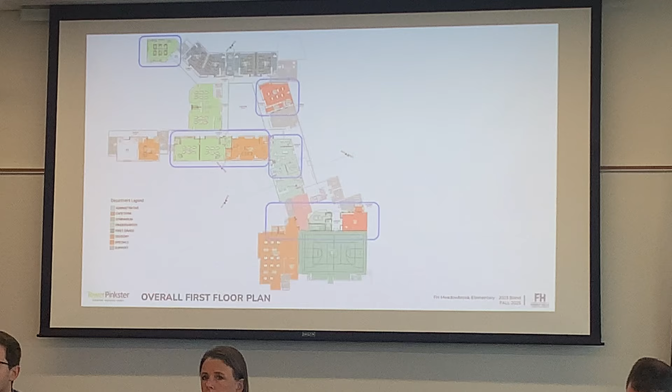We're doing some mechanical updates and, of course, our big move to make learning visible. So again, all classrooms will be touched with ceilings, lighting, finishes, including all of the main corridors. Pretty much something gets touched everywhere in this particular building.

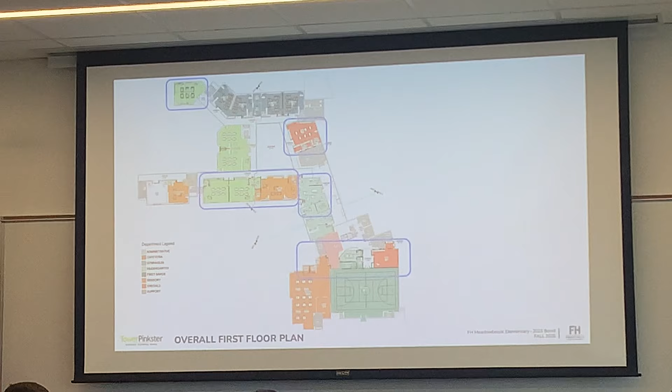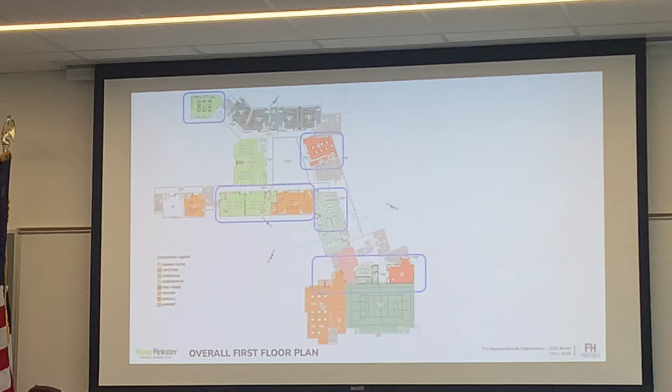The blue areas on the plan - this is a little bit unique because we're two-story and kind of buried into a hillside. So we've taken the opportunity to move some programs around a little bit in this building, because we're able to get art where there's a little more daylight. We're able to expand off of what is an oversized gymnasium right now to move some music programs and also get some conferencing space. So it is a little bit different than some of the other buildings.

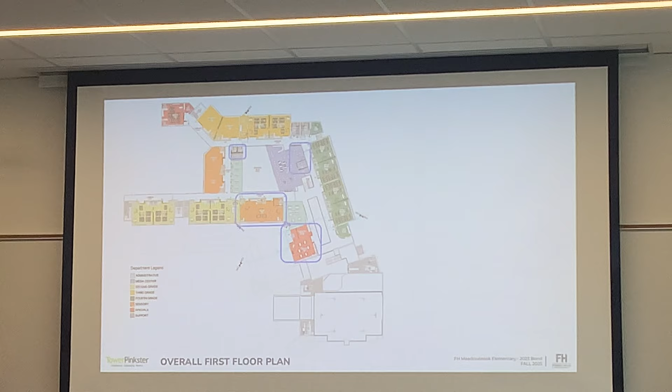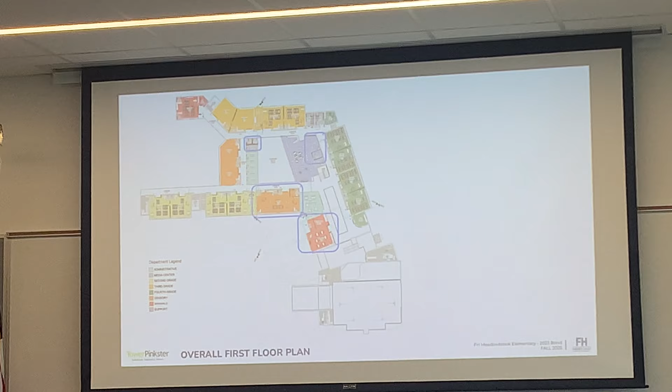Likewise, on the second floor, we're going to move art up to the second floor. We're also going to try to improve some of the CI programs for the lower and upper levels. Currently what they have is not bad, but we're going to try to get them actual accessible toilet rooms with changing tables within them, because they're kind of in a makeshift situation right now. So just a quick rundown of the blue area of what we're improving.

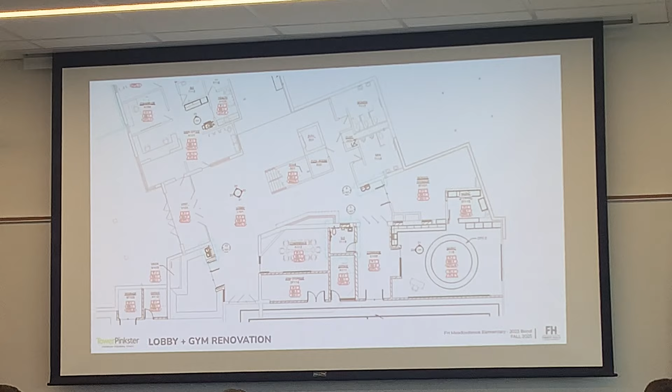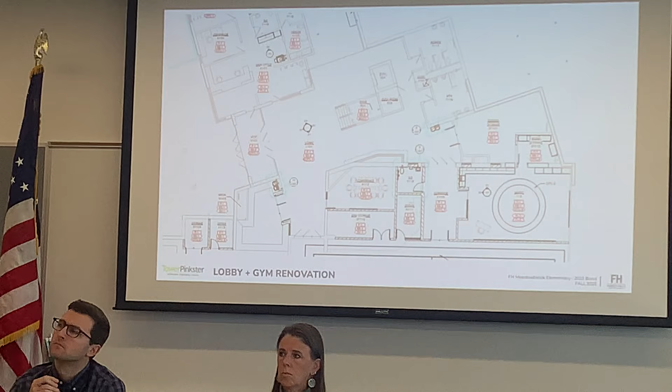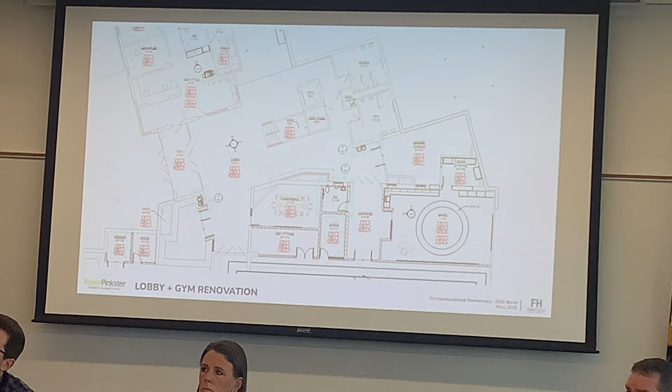One big area is off of that gymnasium. We're going to take over some space that will now become a music room, and also revamp the gymnasium office, add some storage for the gym, and get a conference room in that's a little bit more sizable for IEPs and such, which they just don't have in the building right now. It also gives back a little bit of school storage for the building, which is nice to have.

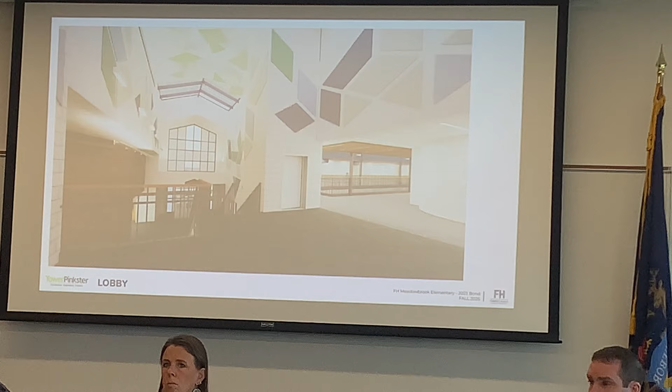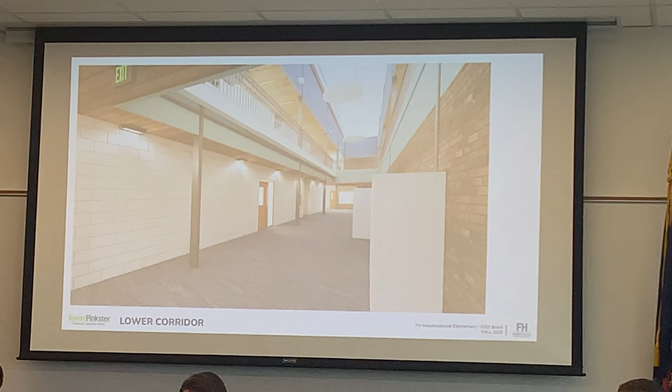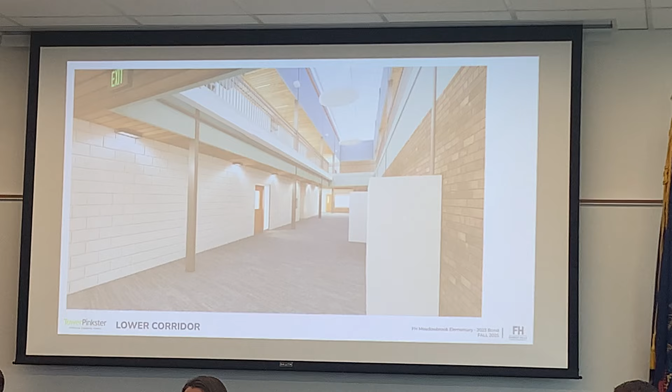And then we're updating, visually, and trying to solve for some acoustics in the main lobby as well as some of the cafeteria space. Some of this is aesthetic, but it's also functional - it's a little loud in this space. So we're trying to solve that by also taking out some hard tile flooring that's in there and giving some good durable finishes. Again, just a visual update throughout that main corridor space, giving it some warmth. We're consistently trying to make a more welcoming environment, and in this case, working with the principal, they still like the idea of bringing in nature, but with a little bit of branding - leaning into a little northern blue without being over the top.

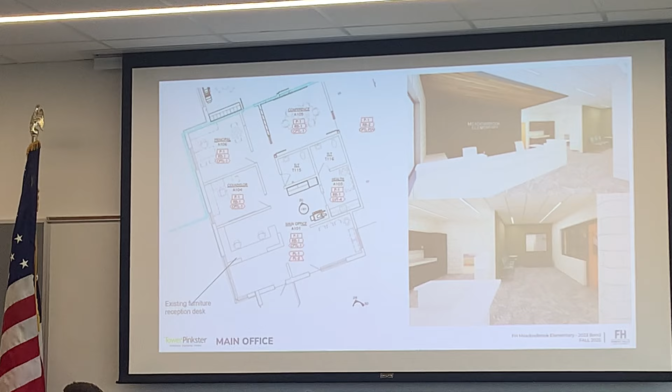Then the office area - we're just doing some minor changes. Again, getting them another conference room in there, as they have some unique spaces that are maybe underutilized right now. So again, similar with the aesthetic and change.

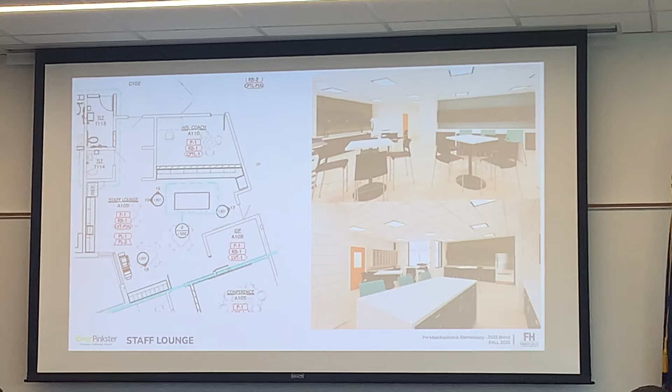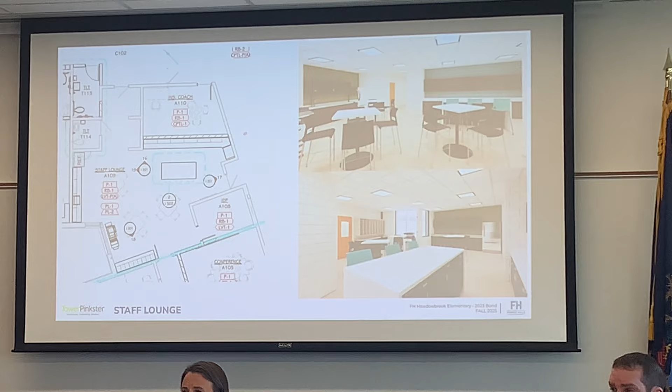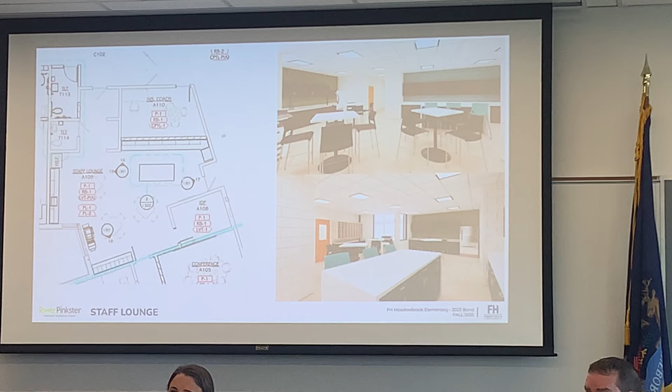And then their break room - again, just because of the way it connects to everything else, we're going to revamp it a little bit to make it better for equipment and storage. They have an oversized version of things right now, so we're going to downsize, get an instructional coach office off the main corridor, and also add an ADA accessible toilet room on the student corridor side, which is that top toilet room area. So now they open just into the staff break area.

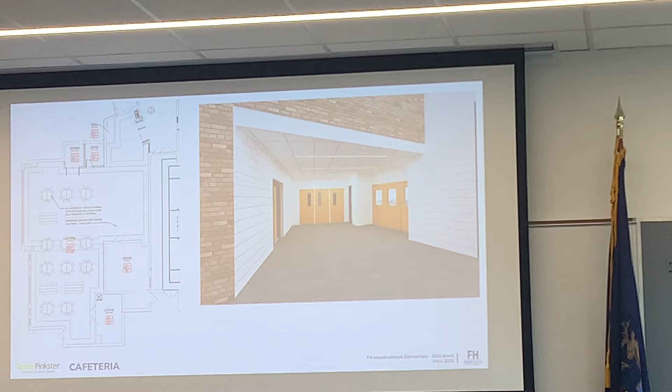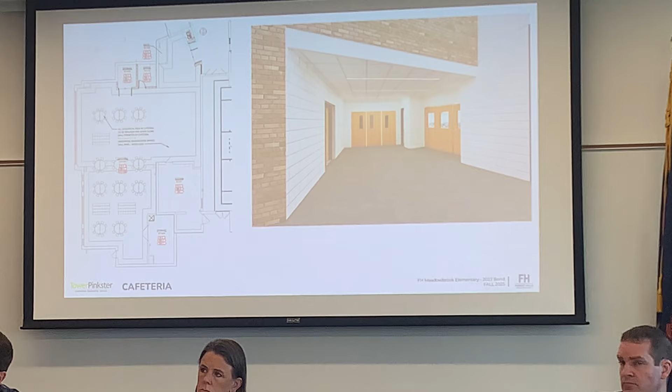And then cafeteria and main entry - we heard there's a lot of congestion coming into that cafeteria, so we're going to change how that entry system works. And again, we've been pretty consistently getting an aftercare office off of every cafeteria space, so we're getting that back, which isn't really existing right now. And again, solving for some acoustics, because we have a kind of loud space in there, but generally speaking, no other walls are moving other than to create that office and a pocket of space.

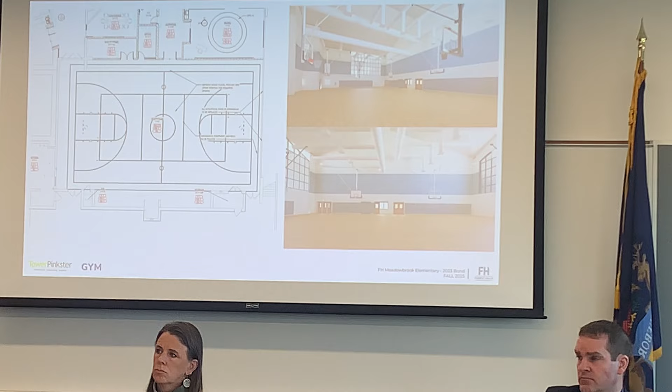And then the gymnasium—this is kind of just a revamp of it as we reduce the scale, but it still keeps cross courts, main courts, everything you'd want at an elementary level, and then some still. So again, just showing that it keeps that intention there.

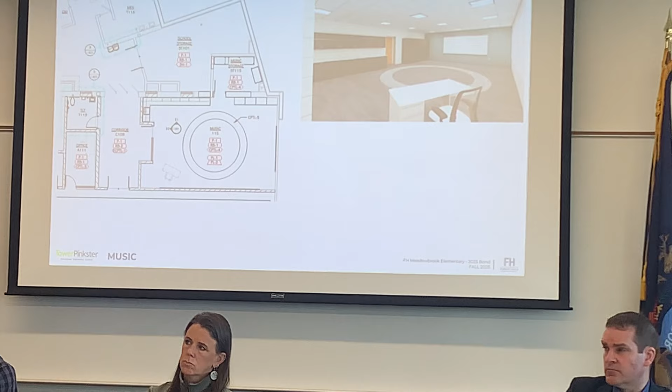And then this is where music goes. So again, just getting a good music room, and it's already adjacent to another space that might be considered loud. So we're trying to take over some of those important adjacencies.

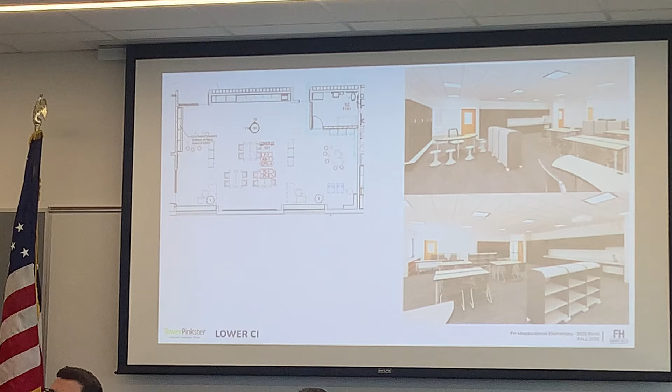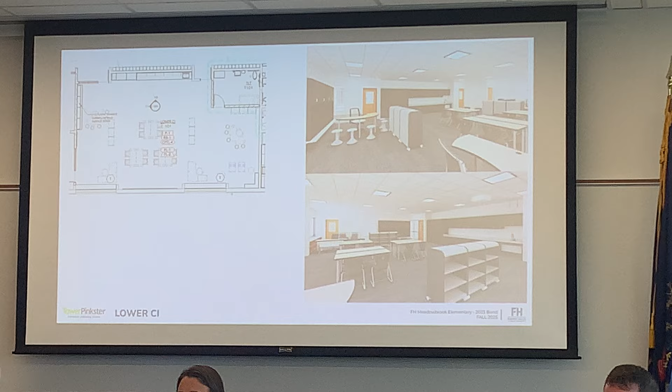And then the CI rooms—again, we're trying to give them a toilet room that has a changing table space, and just giving them a little more room to move, because we have a lot of students who may need more space for maneuverability. We have the opportunity to do that in this building.

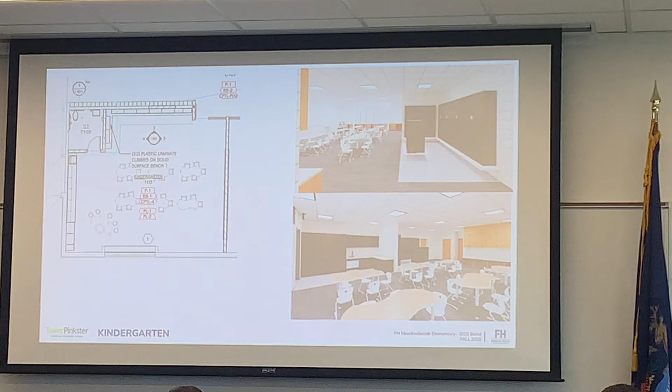So this is the lower CI room. And then kindergarten—we're right-sizing 2 additional kindergarten rooms because we had 2 that were more equitable considering across the district, and then 2 that were much smaller. So we're right-sizing those other 2 kindergarten rooms.

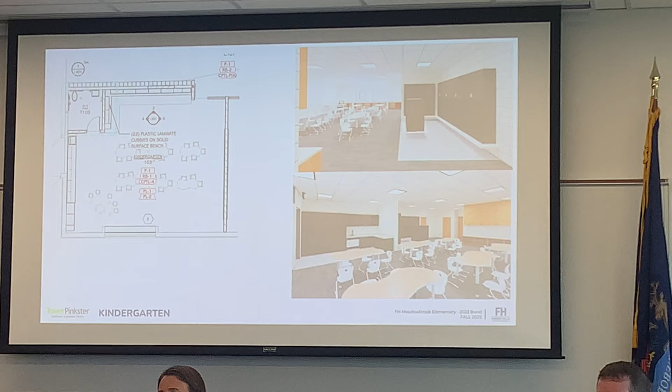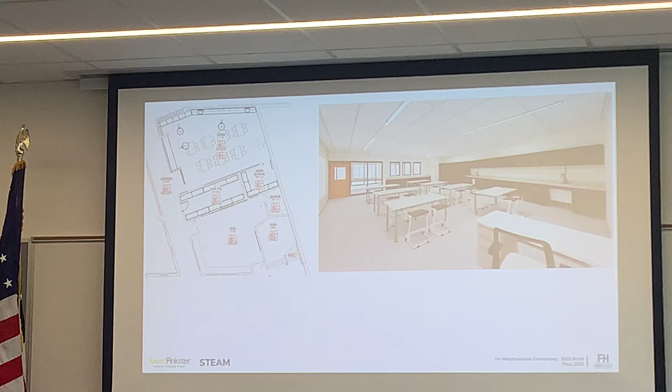And then last but not least, we're taking over what used to be the music room and making it a new STEAM space, giving that program into the building that maybe didn't have a specific well-sized space.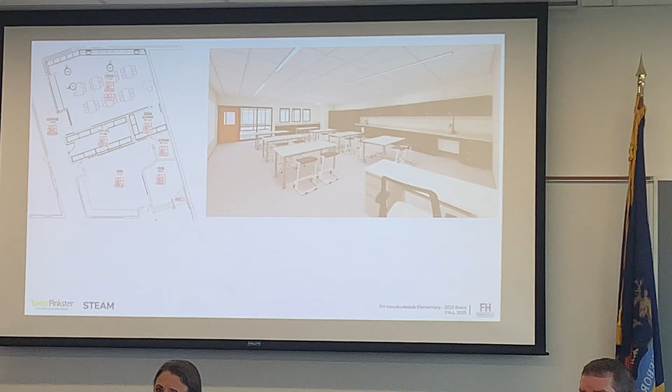There was an opportunity for a smaller room, but this gives them both storage in addition to a right-sized room for them. And then that upstairs art room also gets right-sized. It was very small in this building and not where it could get good daylight, so we've been able to solve both those things and get them some storage back.

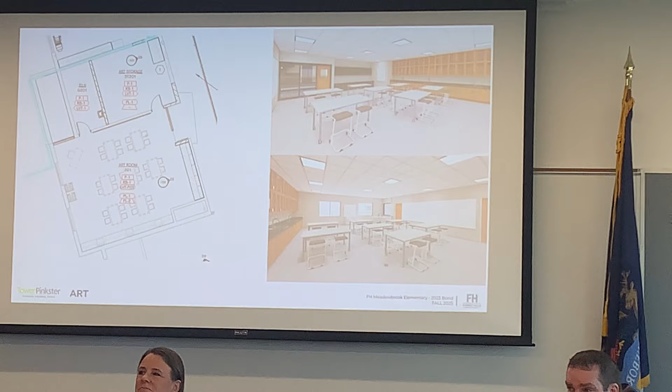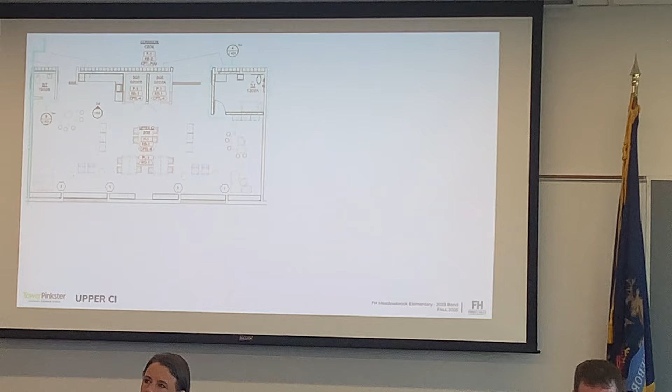So this one, like I said, includes a little more maneuvering of programs to get things to work better within the building, which I think is great. And the upper CI room—again, similar to the lower, but as we say, we try to do what fits for the building, so we've done fairly minor adjustments overall.

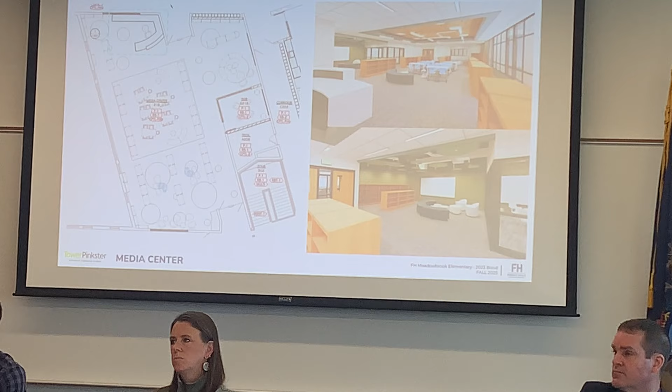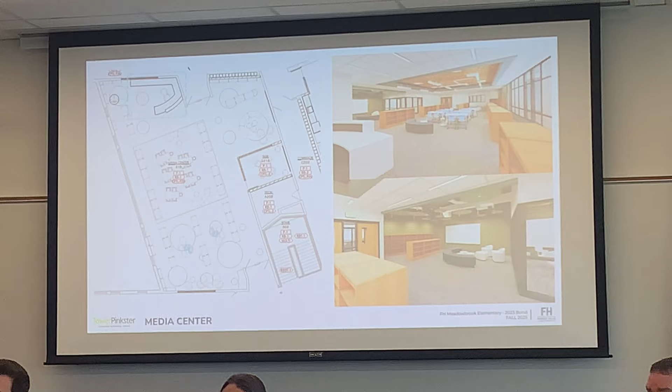And then the media center—again, just some minor updates aesthetically, but also getting a true technology room, because right now it's kind of an alcove closet on the back end of something. So we're able to create a complete room as well as get a small group room in this space.

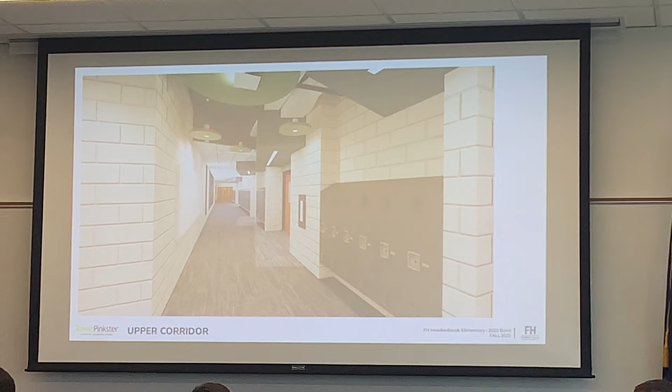And then just kind of what the corridors will look and feel like. Again, just trying to give them a little bit of interest throughout—we're not moving major walls or anything, but we're replacing lockers as well in this building.

So yeah, that's kind of a quick overview. Any questions?

Sounds like you're solving a lot of problems. Should be a good one.

Music next to the gym—I'm sure we've assumed that on basketball day with a thousand balls banging on everything, that's not going to be a problem in there. No, we do have acoustic stuff. It's a very large open space up to the deck, and so we are taking the walls all the way up, insulating them. They'll also have acoustics within that room, and also helps that—how do I go back to that plan? We're creating like a vestibule off of the...

Okay, yeah, I'm just thinking even just the main separating wall—I mean, you're outside of the gym, you can tell there's stuff going on inside the gym type thing. Yep, figured it would be a...